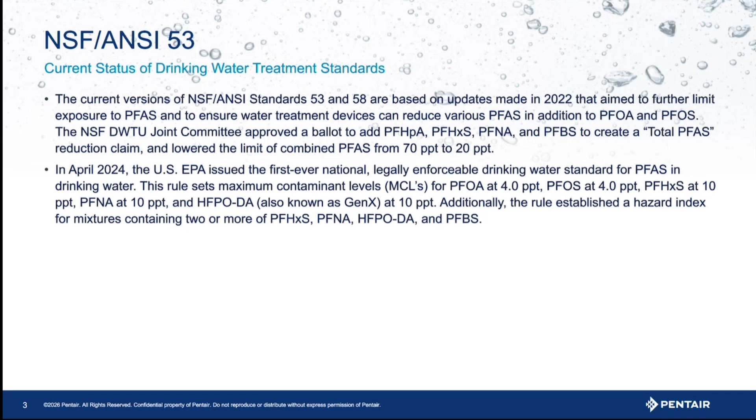And the technologies that we're focusing on in our cartridges are carbon applications. And we have some wonderfully smart carbon engineers that work for us that are taking carbons from manufacturers and blending them to target the spectrum of the family of PFOA and PFOS compounds in there to meet this standard. So if you're wondering about what we're using, we're actually using a blend of carbons very similar to a blend of fine wines. It's going to give you a different impact on your water system because we're selecting those things.

So the reality of water treatment technologies, you want to understand what you're using because it's not all the same. Not even all activated carbon is the same. You can do a lot with this stuff. So understand what you're using and understand whenever we're using activated carbon or a resin to remove materials, those cartridges

need to be changed on time or on a regular basis because there's an end to how much a thing can hold. And at a certain point, you may overwhelm a cartridge and it's no longer functioning, and it may actually be sloughing off stuff we don't want into the future. And that's true of all activated carbon. So make sure you're changing cartridges on time.

And many of these compounds will be reduced by activated carbon, but are they validated to do so? Understand that ozone and ultraviolet light will break down some of these compounds into smaller pieces as they're being treated. So we want to understand that this product is going to be capable of capturing some of those breakdown species

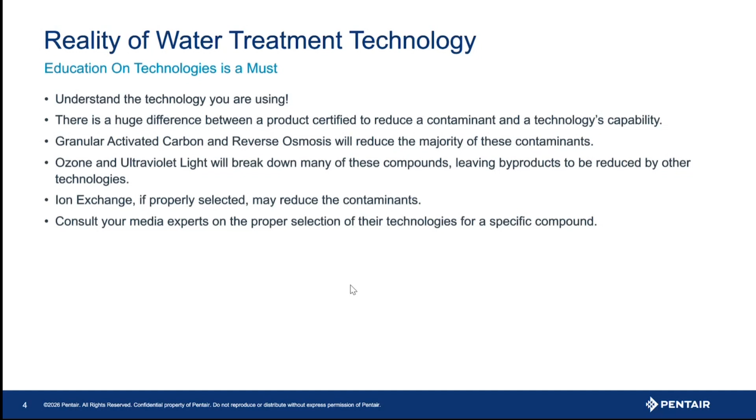as well. So if you have questions about the medias you're actively using or would like to use more, we encourage you to consult with your media experts or your contacts at media OEMs to learn more about their specific technologies for your needs.

Now, understand the implications of your choice of your technologies. In residential applications, discharge of RO and ion exchange is permissible in municipal sewers. They can also dispose of cartridges in their garbage, sending it to a landfill. Where you may need to be mindful is in commercial applications where you may have to meet discharge standards.

Presently, this isn't fully regulated on the discharge side, but whatever happens on the drinking water side tends to cascade eventually to discharge. So understand you may have implications there and may need to consult folks on those discharge standards. Commercial applications may require you to collect these medias and dispose of it properly.

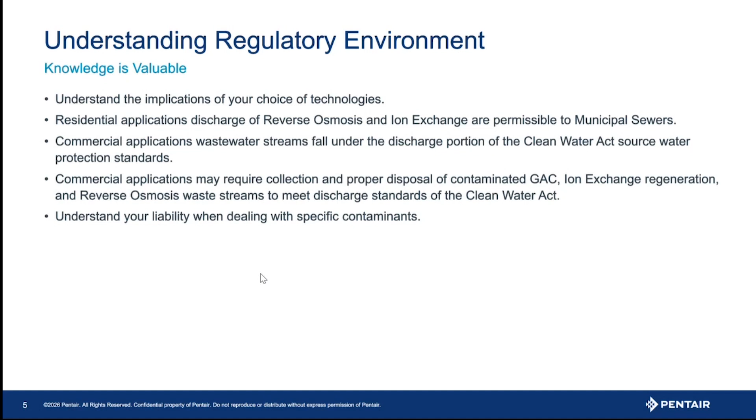And if you own a small business and you put this material onto your vehicle, then it transforms into commercial waste. So understand your customer may be able to dispose of cartridges in a way you may not because of your commercial designation. So understand your liabilities and particulars in your market or state or municipality. It's worth a half an hour call to your attorney or technical advisors on those accounts to make sure you're disposing of things properly, as we are trying to remove a toxic substance in some of these cases.

Now, when we talk about the Fibredyne cartridge, and I'm a bit of a fanboy of this cartridge. I was using it in my home before I ever came to Pentair 15 years ago. I love the synergies of a complete depth filter and the leverage of powdered activated carbon in this design to give you massive surface area and contact with water while leveraging a true depth filter.

And one of the great things about a depth filter in this tortured path is on pulsed flow in a normal household situation, the dirt reorganizes in these filters and it's limited by a final core, which gives me the filtration I want and desire.

And these cartridges are going to be in a 0.5 micron size, but they flow the equivalent of a 10 micron comparable block. So you get wonderful full flow through these cartridges with 0.5 micron filtration and all the other benefits we're going to talk about, because we can vacuum mold this material with different blends of carbon, different blends of exchange resins and things like that to create a family of cartridges tailored to your specific contaminant removal needs.

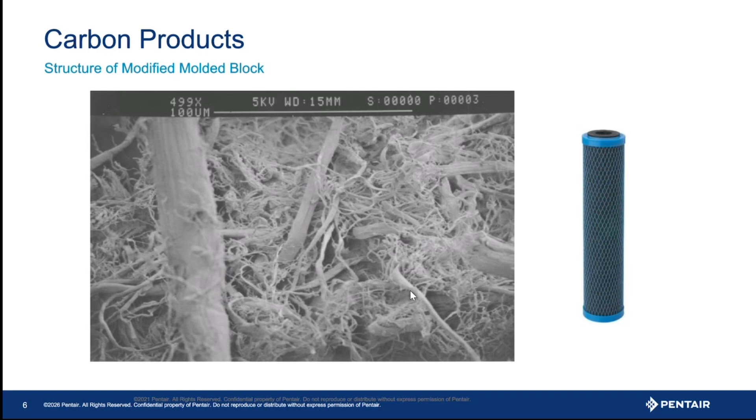And imagine trying to get a piece of dirt through this tangled mat. Very, very difficult to do. Going to remove tons of debris. And one of the other things about cartridges is carbon block filters and GAC filters all produce carbon fines. Now, that doesn't sound like a big deal until you enter a home or a business that has water using infrastructure that has opening and closing valves in it.

In a home, ice makers in refrigerators. If you don't properly flush a cartridge, you're going to get this debris into units. And over time, it's going to wear down components. It's throwing grist into the works, right? And the great thing about the comparisons you see here, the ones on the left are the first flush within the first minute. And the last ones are after 5 minutes of flushing.

And this is 5 micron filter paper. So this is large particulate relative to what we want to filter out. Fibredyne gets you in and out so much quicker on site, very, very quickly, cutting 10 to 15 minutes up to a half an hour, depending on the cartridge, to get it flushed without risking impacting equipment downstream. And if we impact valves, sometimes we can create a flood situation. So this limits technicians making mistakes in the field, trying to be in and out a little bit quicker.

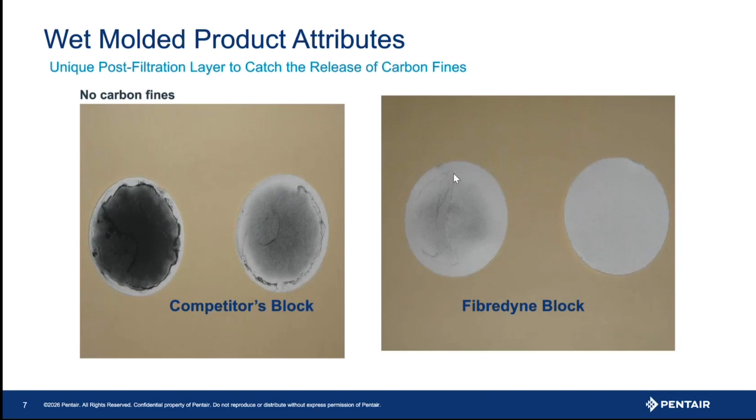This helps solve that. A lot of companies just throw them in and flush them for 30 seconds and move on down the road. Now, what's great about a Fibredyne block is the increased flow through this. At a 0.5 micron, compared to an equivalent extruded carbon block, you're going to get double the life of that block. And the 10 micron version, you're going to get almost 3 times the life out of a 10 micron version of this block.

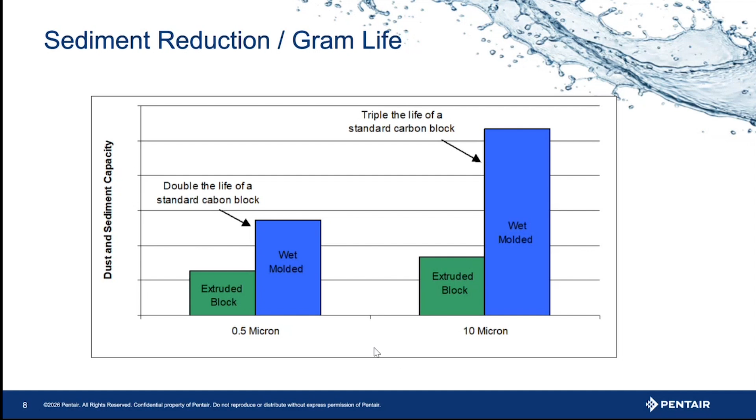I have specified this filter personally in very, very challenging places. And we've found, and I personally have found, that I will double the life of any existing carbon cartridge in there. If it's a comparable sized 4x20 carbon block, Fibredyne is going to give you at least double the life in that same situation. And that's just practical experience.

That's probably going to get you through a good chunk of the year. If you need more than that, you can plumb these in parallel. If you need to get higher flow rates, like my busy home where I get up to 10 on a frequent basis, I would have 2 of these in my home, but that is still much more affordable than, let's say, a backwashing carbon system or an anion exchange system on the end of my other equipment.

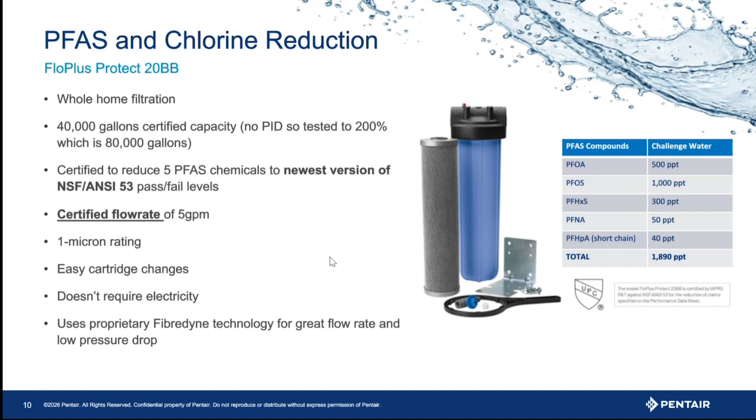No electricity for those off-grid folks who may have some concern here. Wonderful in a well water application, but in those situations, I would suggest putting a sediment filter in front of it just because of the dirt loads involved. We have Fibredyne blends for lead removal. So if you have an area that may not have PFAS concerns on a municipal water source, but it's an older community, this is wonderful for that.

I have townhomes in Toronto running off of one of these units in the garage that serves both units. Very, very cost effective there. And if you want to pair these with the FloPlus Protect for PFAS, you have lead and PFAS protection in series. 5 gallons per minute on the PFAS and 10 GPM for lead. And both of those do chlorine removal.

And let's say you have a cabin or an RV or a kid going off to college. I did that for my own son. I grabbed a Fibredyne cartridge similar to this, but we have our lead reduction and a smaller version for PFAS. I just popped this in a bucket of gravel and used flexible connectors, and I hooked it up under his sink while he was at school so he could have filtered drinking water in his dorm. So that's a wonderful upgrade for a college student, believe me, especially where we went to school.

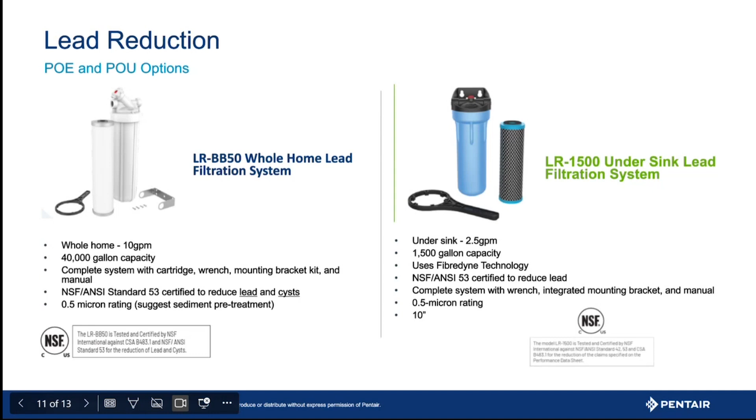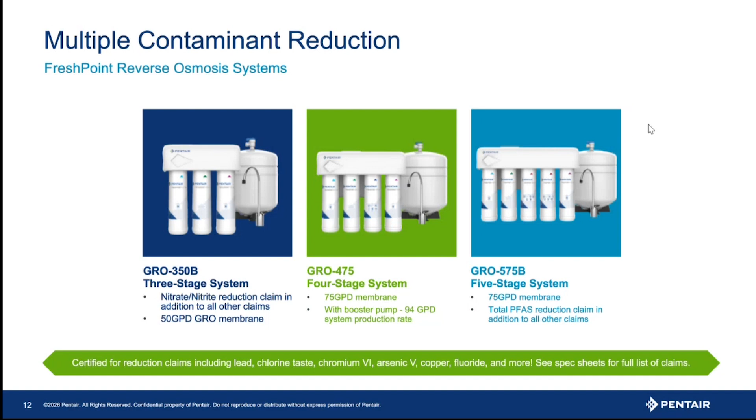Like I said, I have a drinking water RO at home just for these sorts of things, mainly for what we don't test for, because I'm just wired that way, but I'm also the house where I have teenagers dropping by to get water to and from school on their way to practice in my small little town. So the water is well known in my community.